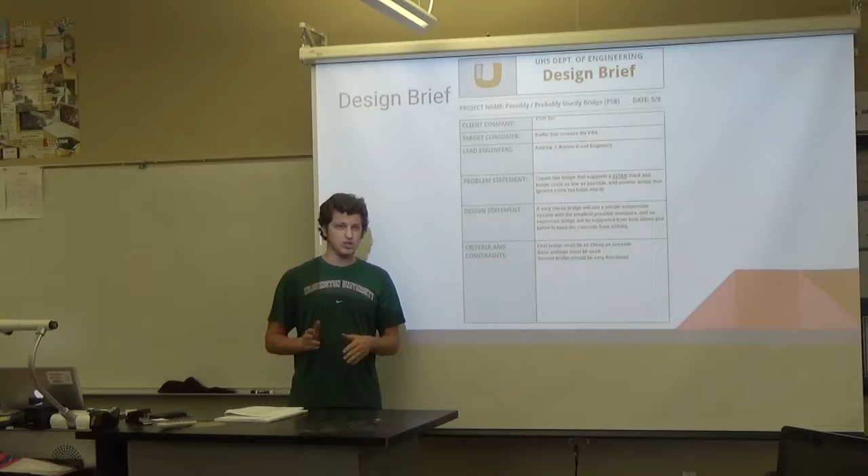The client company, it says PSB Incorporated. The target consumer is all the traffic, in this case that one truck that crosses both PSBs. The lead engineer is, that looks like my name there, Andrew J. Korver, lead engineer. There are no other engineers on this project. I am fully responsible for what you're about to see.

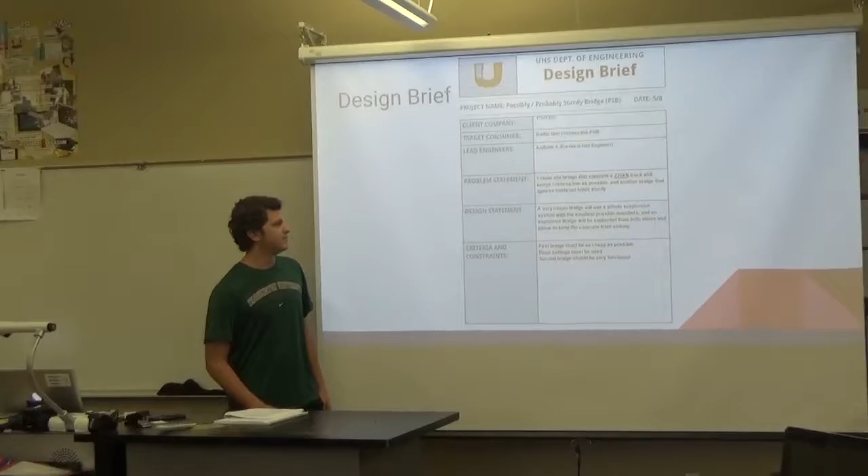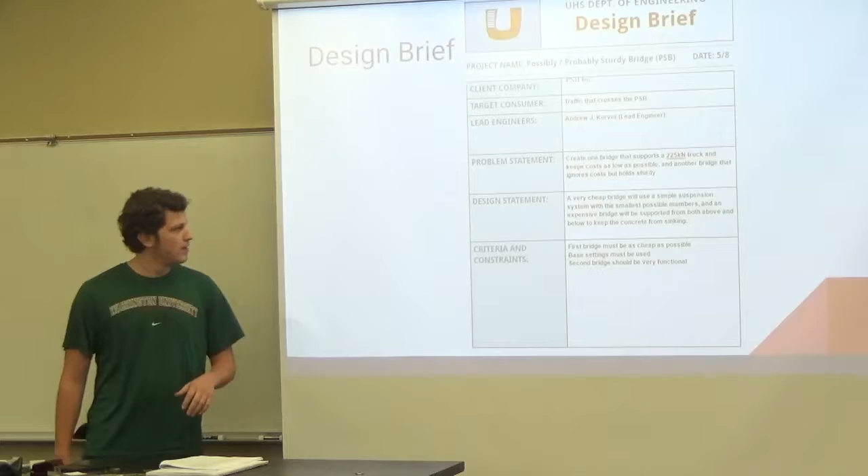The problem statement, we are trying to create a bridge that can, one of the bridges is going to try to support this truck going across it while being as cheap as possible. The other one is just minus the cost, trying to look cool and keep it in place. That should turn out well, right? And basically all that's just kind of going out the same stuff.

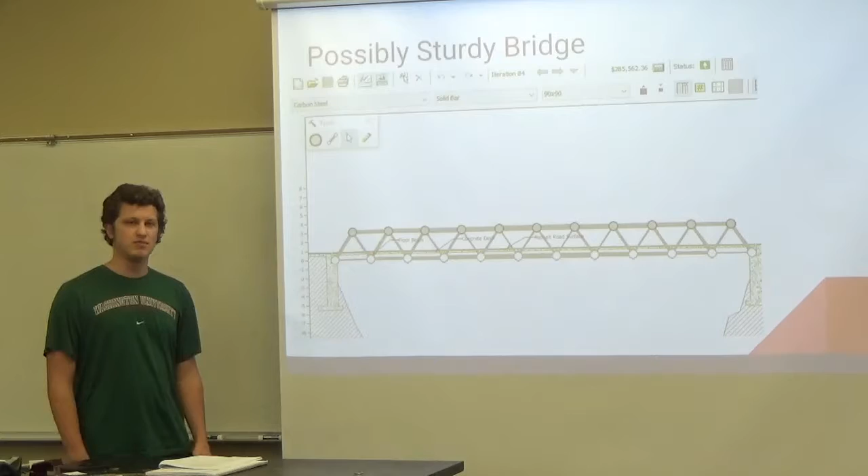So the first one is the possibly sturdy bridge. This one I tried to make as cheap as possible. It employs a really, really simple strategy where it just kind of pulls it up from up top. Basically, every single one of these members, I tried to shrink down to the lowest possible amount that I could get it to without it bending or snapping from tension or compression, not in that order.

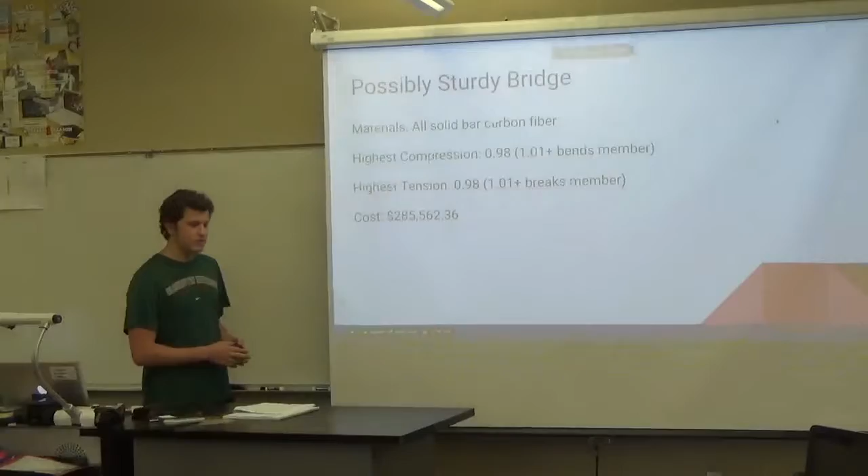And as for the materials, I used the same material the whole way, to be honest. It was carbon steel, not carbon fiber, that's actually a mistake. Solid bar the whole time. So no hollow tubes, no other materials, just the whole thing's carbon. The highest compression of one of the members was that close to getting it to bend. Same for the tension, it was that close to getting it to break.

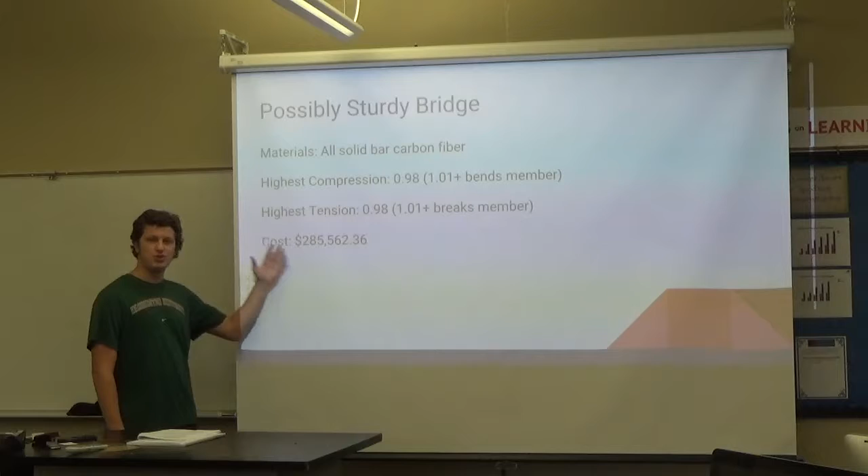So that shows that I really tried to stretch this to the minimum amount without it breaking, just to keep the cost down to $285,562.36, if you have that lying around. You can put this in your account.

Here's a financial breakdown of it. As you can see, it's pretty simple as to what I used. Just carbon steel bar the whole way, just different sizes. Because with every single bar, I tried to get it down to the lowest possible size. Usually it's the exact same on both sides, but not always with the middle pieces.

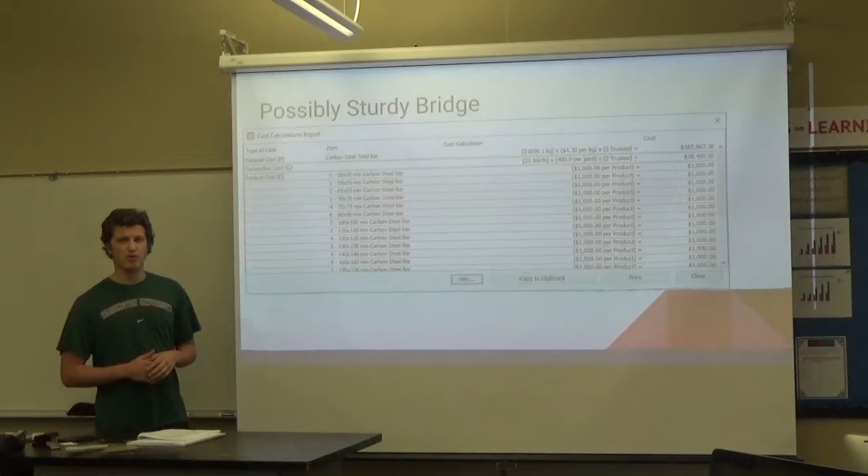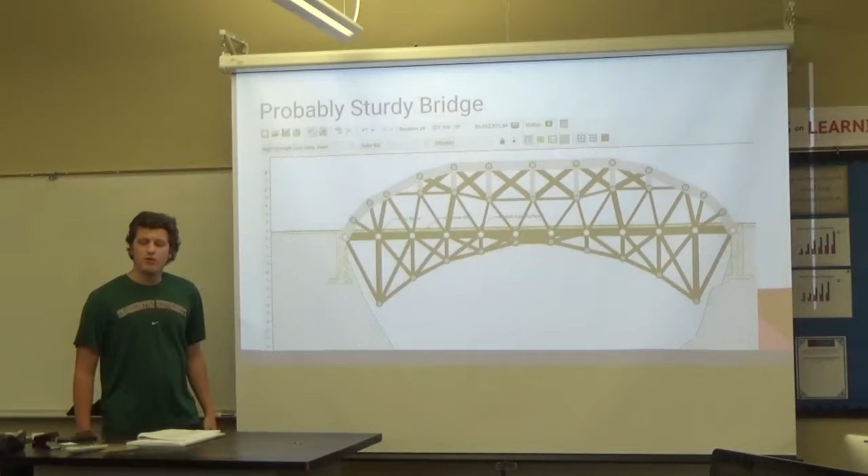Now for the probably sturdy bridge. It's probably sturdy. It should hold on. This time I actually kind of went a little complicated. I wanted to put a bit of an arch here to try and support it up top while having it supported from the bottom here, and it overall just looks pretty cool. And when tested, it actually turned out being probably sturdy.

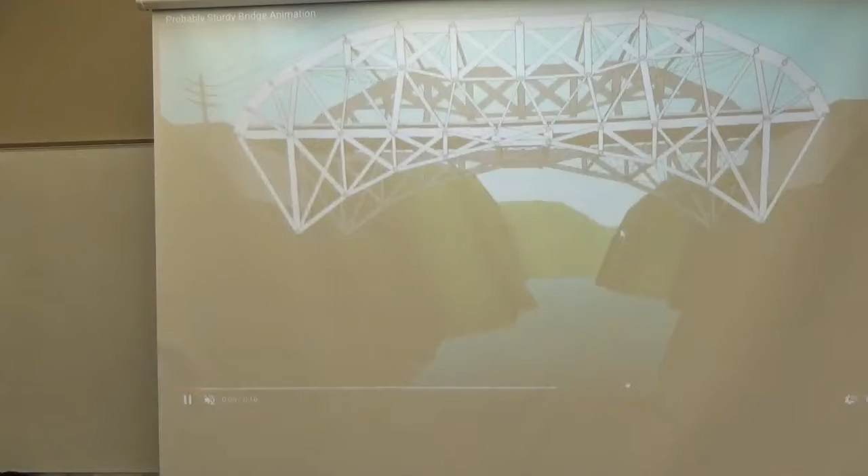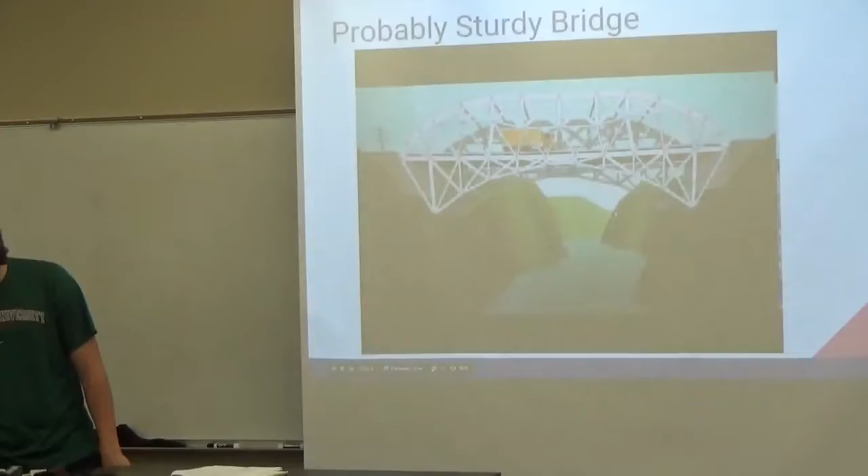The bridge barely sinks at all. With one truck, we'll see what happens when we test it with the traffic jam next time. For the materials, this time I did switch it up a little bit. I went with 2 materials instead of 1.

A lot of it is still solid bar the whole way, but for some of the stronger parts I needed, I went to... most of it this time is high strength low alloy steel. It's not carbon steel this time. But for some parts of it, I actually used quenched and tempered steel too, because that helped keep it from moving more on the concrete. So the thing wouldn't just suddenly dip like the possibly sturdy bridge.

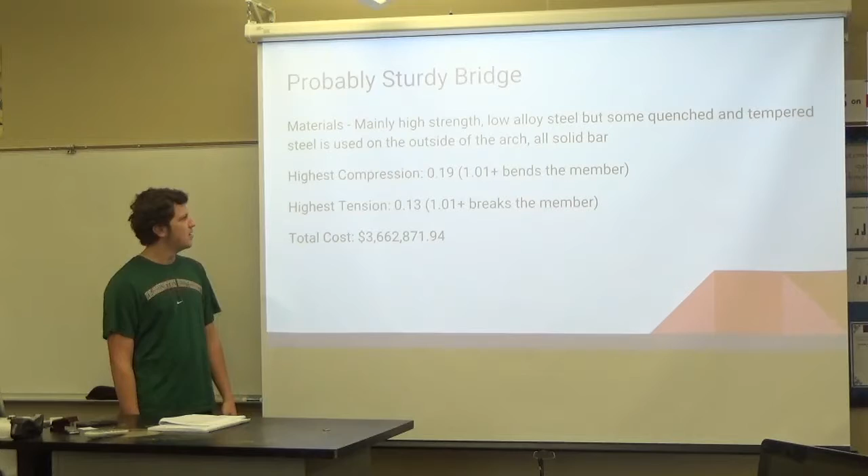And because of how I built it, there's a lot less compression and tension put on each of the members as compared to the possibly sturdy bridge. This time it's only 0.19, 0.13. That's about a fifth of what it was before.

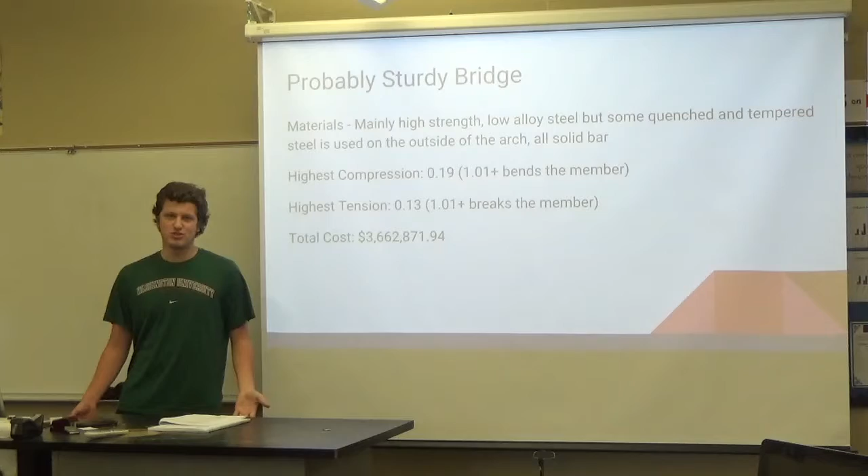And this time the cost is going to come out to $3,662,871.94. Once again, if you got that lying around like in the backseat of your car, you can put that in for a bridge somewhere. Probably better than some of the bridges we have. Very well designed though. I really like their engineer.

As you can see, once again, I kind of used the same material the whole way, but I sometimes switched it up, and sometimes that ended up costing me a little more. It kept it under $4 million. That's actually really cheap. That's very affordable for everyone.

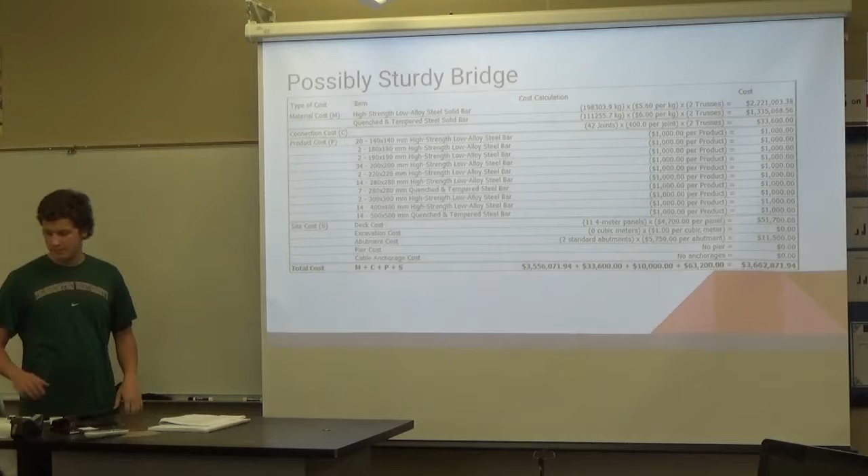False. And any questions? Also, sneak peek into our... I forgot that one. Next up, also we're going to do the Poorly Sturdy Bridge. Why are you looking at me?

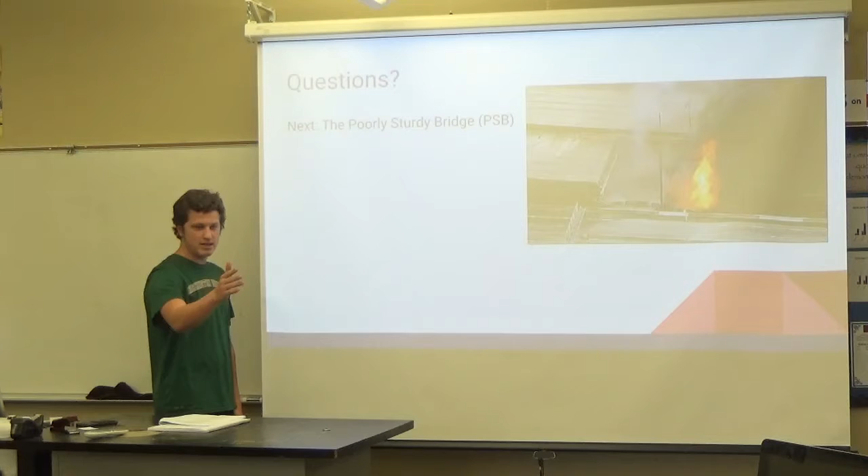Poorly Sturdy Bridge is going to cost $30 million, but it's not going to move at all with the total of 50,000 cars on it. Which is going to be very practical and useful for every single situation that you can totally fit

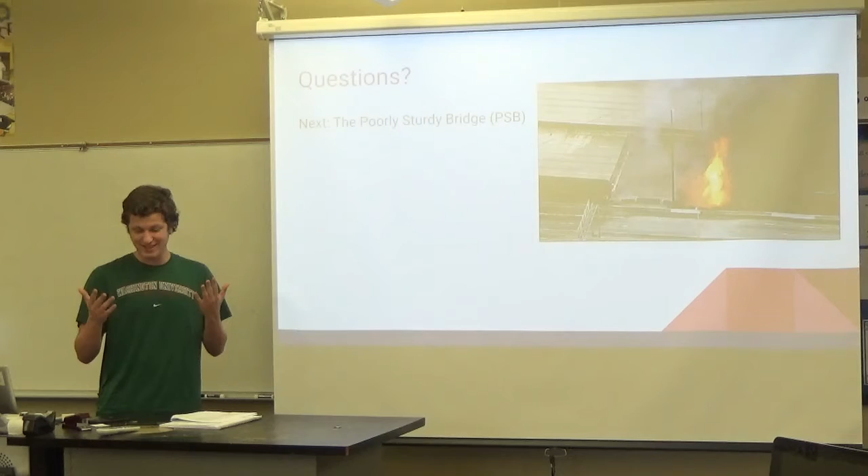50,000 cars. What are you talking about? Yeah, what are you talking